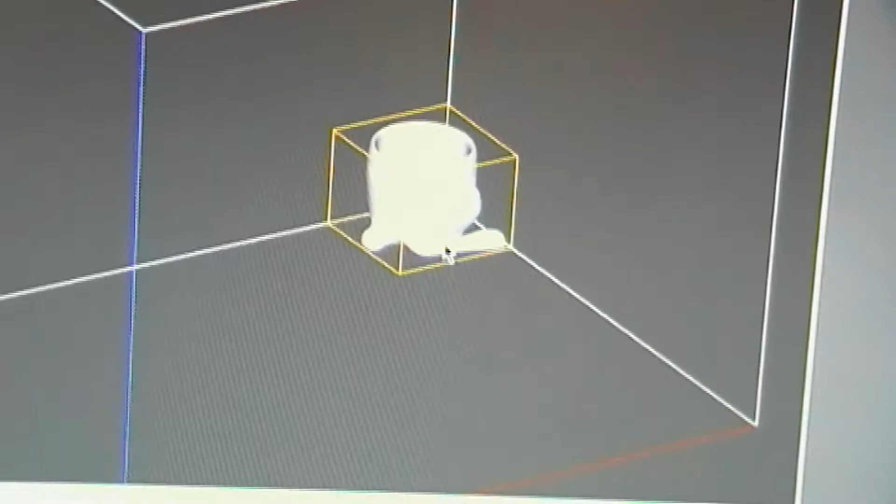One of the issues you may need to consider in 3D printing is scaling. You can scale on the x-axis, y-axis and z-axis as it is a 3D model, and you can also change the percentage of the scaling.

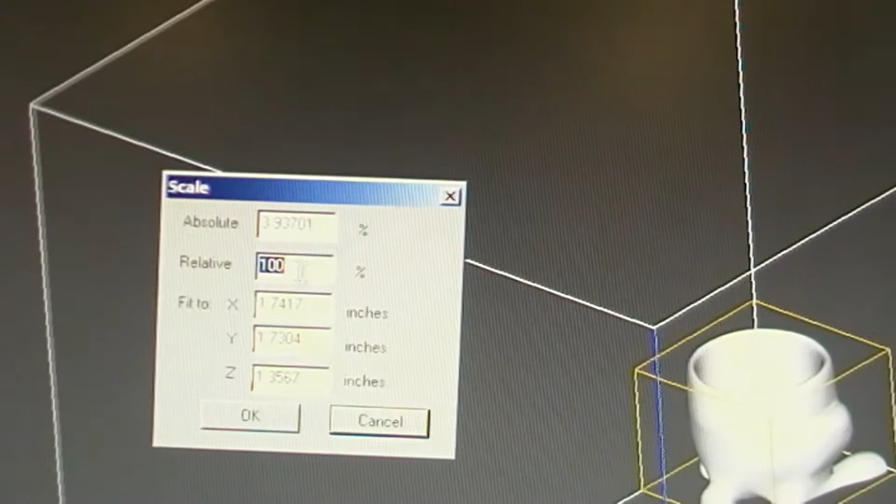This is how the model looks now that it has been scaled down. As you can see, it's a smaller size. We can rotate to see all the angles of the 3D model and how it will be printed in the printer bed.

When you are happy with the scaling of your model, you can go into the File menu and check the time estimate of how long your model will take to print. This records 1 hour and 31 minutes.

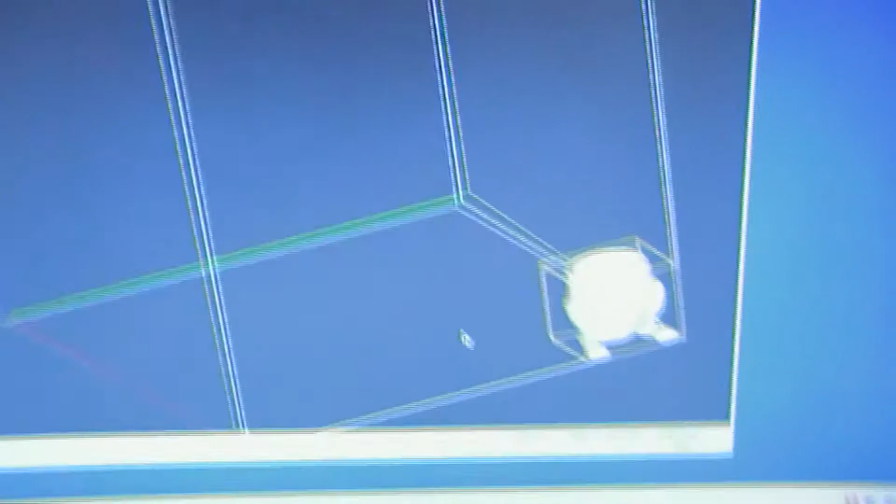The outline square represents the print bed of the 3D printer, and the 3D image aligned to the corner is there to show the best place for printing this model. In terms of orientation for this model, it will be best to print it from bottom to top. However, in some models this may vary.

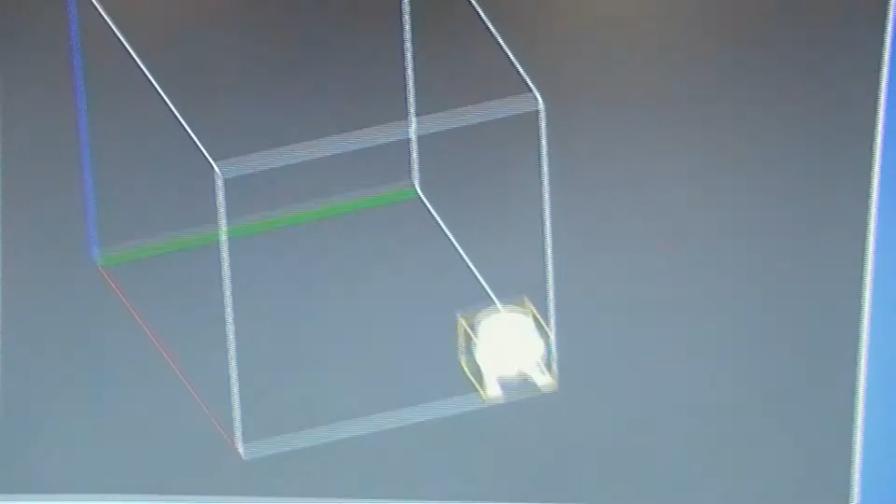It is very important to check the structure of your 3D model to see whether there are any gaps. There is an allocated tool on this software to check whether your model is ready for printing.

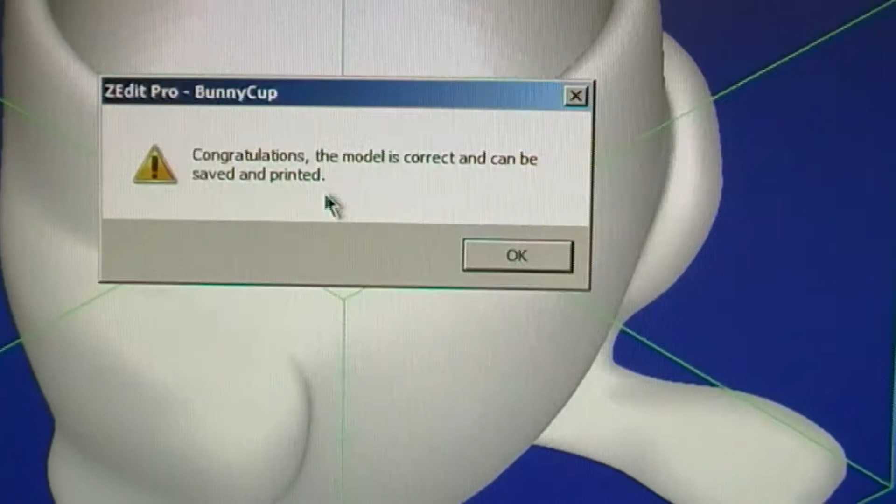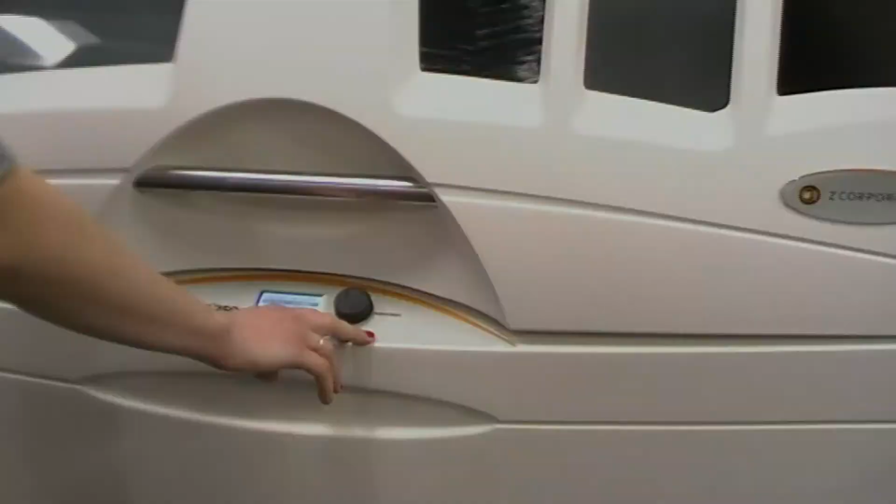As you can see here, it says congratulations, the model is correct and can be saved and printed, showing that there are no gaps in the model. The 3D printing model we're using is ZPrinter 350, designed by the Z Corporation.

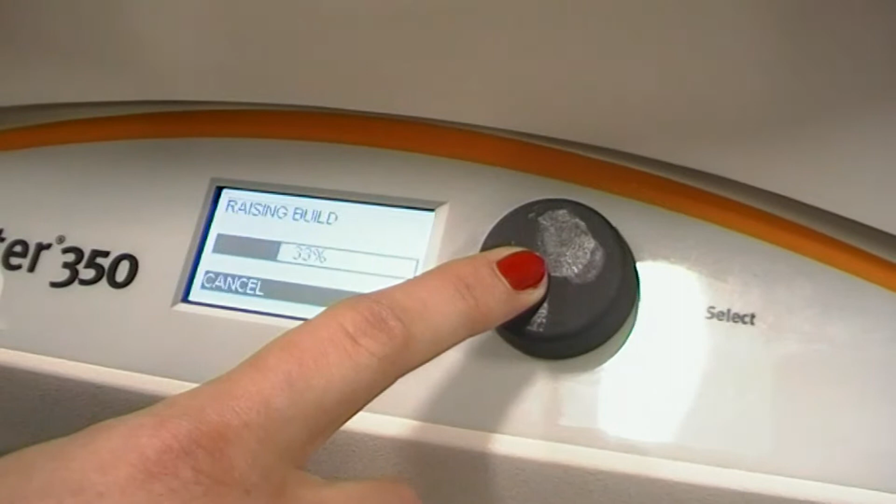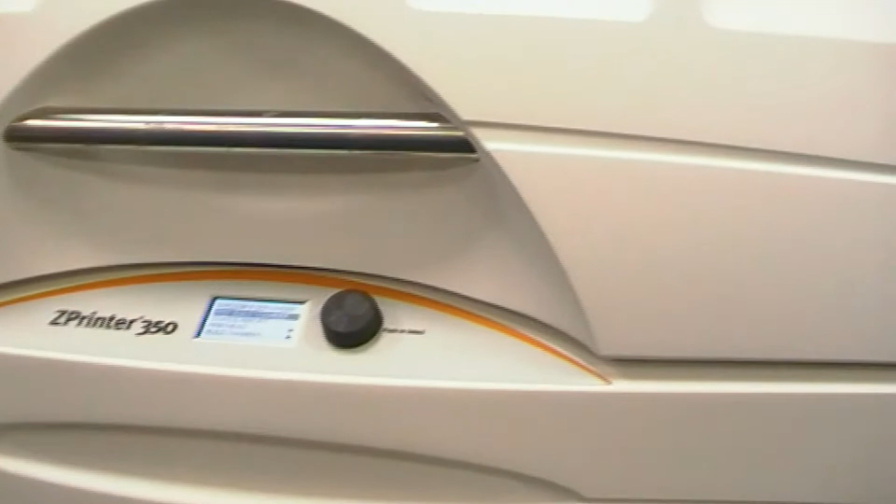If your file is ready to print, you can just head over to the File menu, scroll down and select 3D print. This will send the information to the 3D printer you're using.

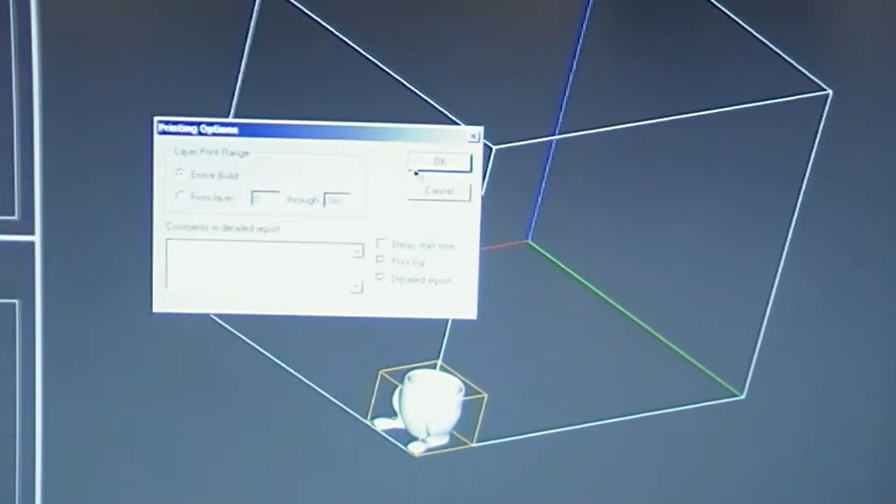Once the printing function has been selected, the process will start for 3D printing this 3D object.

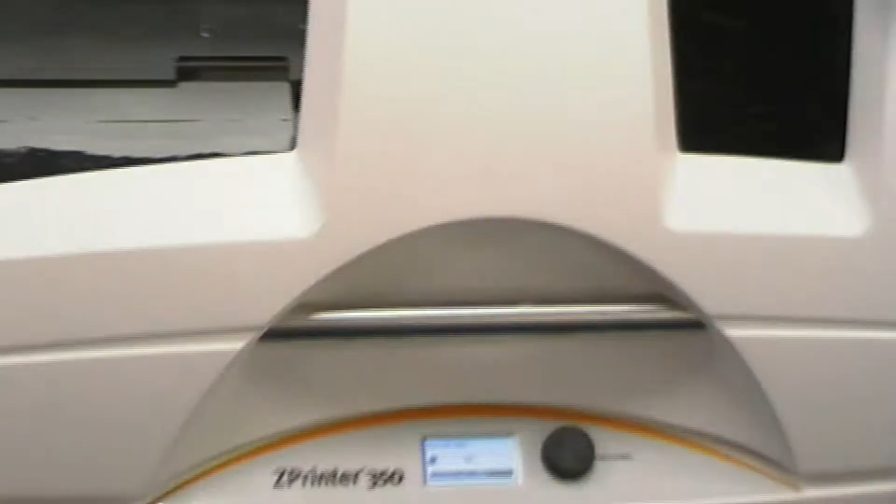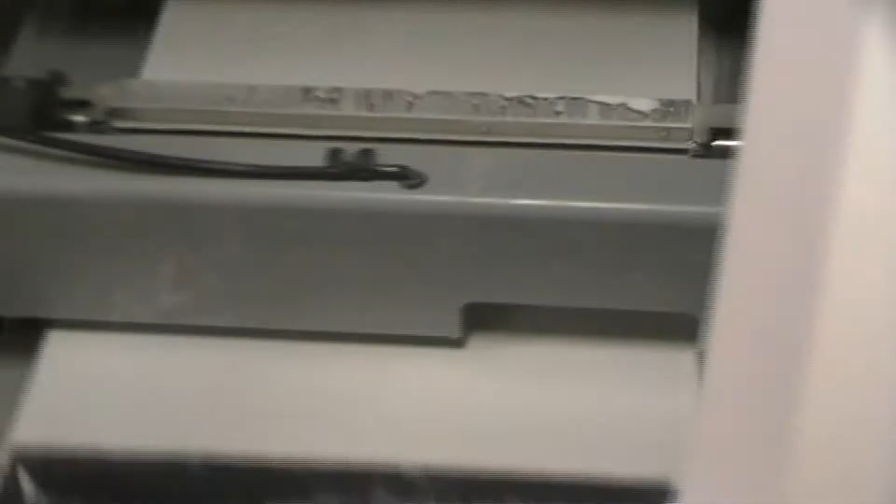As you can see, the printer is now ready to print a 3D model. It has been sent. This is done by additive manufacturing techniques to build up layers, leaving a 3D model.

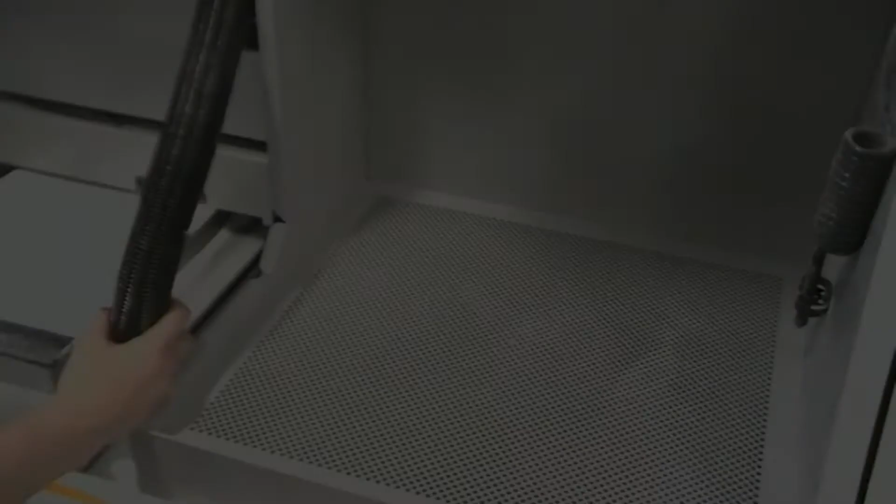When the 3D print is done, this is the part where you extract the 3D model.

You can use a brush at home to get rid of any unwanted powder. This technique will clean the 3D model.

After your 3D model is printed and is dried, you may need to improve the quality of the structure. This can be done by combining it with a glue solution, which will make it harder and its strength firmer.

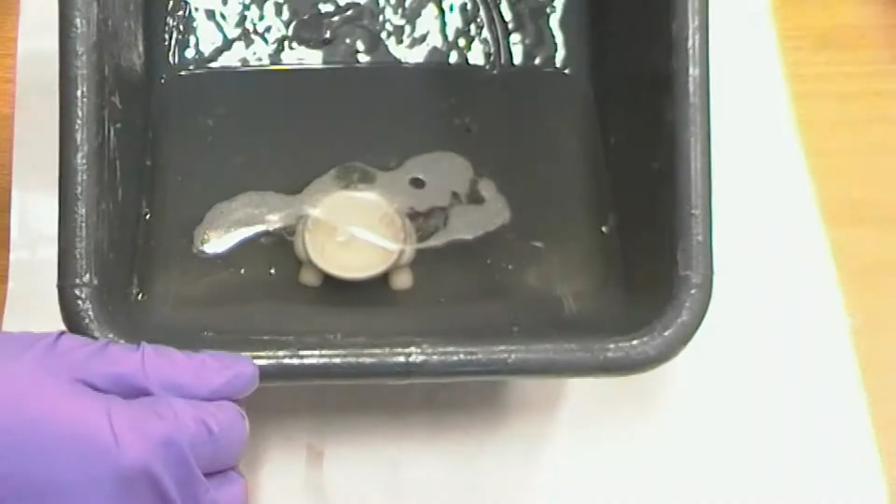You only have to leave this in for a few seconds for the best result. Once the bubbles disappear, this is a sign that the process has been completed.

After the process is finished, we just need to remove the model and place it somewhere to dry.

When the 3D process is finished, you can sand down this object to get rid of all the additive layer traces, and if you wish to paint it, you can use acrylics or watercolors to add color to this model.